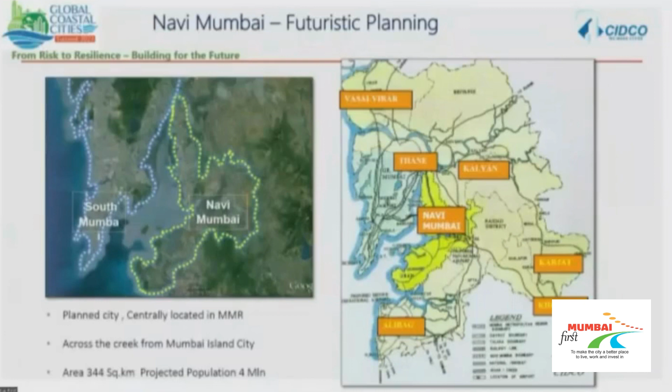And now, with the Mumbai Trans-Harbour Link coming up, Navi Mumbai is going to be one of the most important sub-regions of the MMR region.

When this city was conceived, it was just an area of low-lying lands as well as hilly regions. At that time, though this climate change and sponge city concept was not much discussed, the city planners of Navi Mumbai took a very important decision to create it. The base of planning of Navi Mumbai, or the design of the entire city, was based on the Dutch method of reclamation.

Navi Mumbai has a particular unique geography. It has hills on one side, and coastal region on the other, and the developable area falls between these hill ranges and the creek.

So during high tide, there is always a high probability of risk if it is coupled with high levels of rainfall as well as high tide.

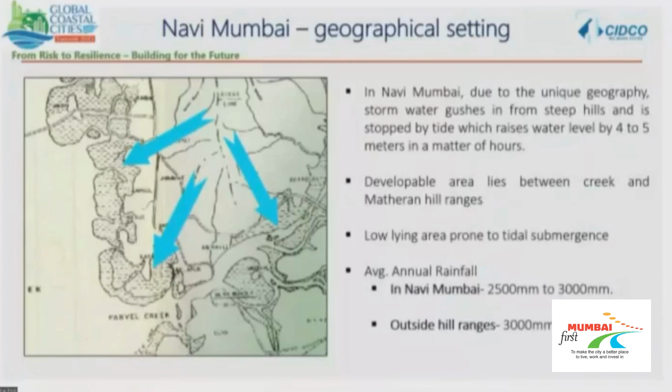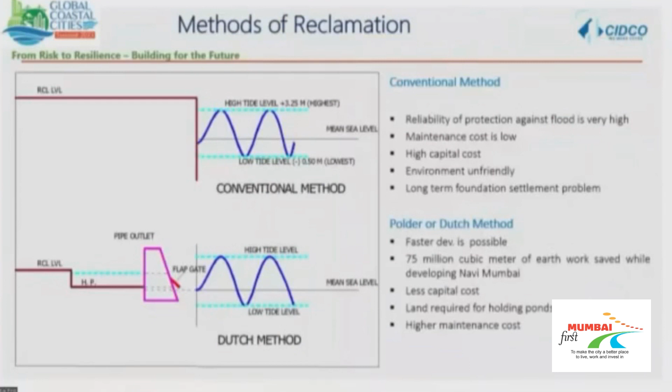This particular process was analyzed - the conventional method of reclamation, or should we go for this Dutch method of reclamation, where there's faster development. Maybe we kept the development levels at a lower level, and by creating bunds all along the coast and holding ponds - this is how it looks.

So if you see, there are hills, and the runoff from the hills and the hinterland - we have built diversion channels, and the township is built in that particular developable area. We have holding ponds with a non-returnable valve, which collects the water during high rainfall.

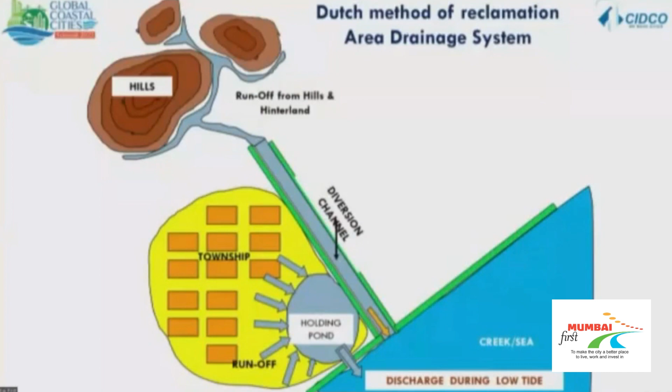In short, it is discharged into the sea during the low tide. This is how the system has been developed, and this has actually served the city for the last 50 years.

Except for the July 26th event, we have never had a flooding incident, or any kind of incident that old Mumbai has been facing. However, there have been issues, like bunds being broken illegally, or such things - we are facing certain problems. Otherwise, this system has been functioning quite well.

But however, now comes the development of Navi Mumbai International Airport, where we had to go.

This again is a kind of a tug of war between how the development should be, or whether we should develop such an airport in an environmentally vulnerable area.

But at the same time, the existing Mumbai airport was facing a lot of capacity constraint. We had no other option but to go for a second airport for the MMR, which is very important for the growth of the city for the next 50 or 100 years.

So in this case, CIDCO deviated. The Navi Mumbai airport is supposed to be a 90 to 100 million capacity airport, which is going to contribute a lot to the economic growth of the entire region, as well as maybe even the state.

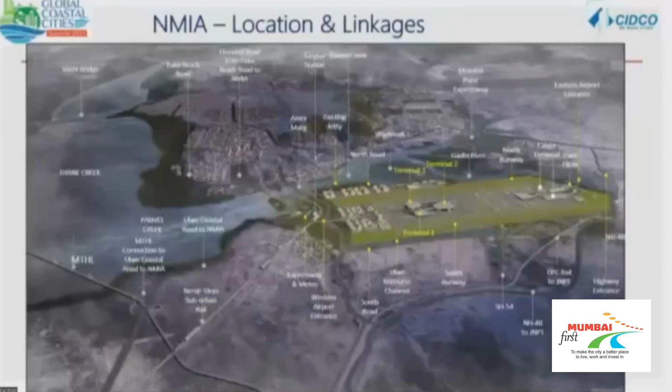It lands at Shivaji Nagar in Ulwe, and from there CIDCO is making a Palm Beach Marg kind of road, the Ulwe Coastal Road, which will have an elevated link that directly lands into the airport. Ultimately, when the Sewri connector is made, the Worli-Sewri connector...

Once somebody gets onto the Bandra Worli Sea Link, then you don't have to come down at all. You directly land into the Navi Mumbai airport. That is the ultimate planning MMRDA is doing, which will ultimately make the airport accessible to the entire MMR.

So CIDCO deviated from the earlier concept for this particular project. We roped in CWPRS, the Central Water and Power Research Station, who are the main experts in modeling the hydraulics and concepts.

I'm not explaining the full thing, but we had CWPRS do the 1D and 2D models for the entire catchment area of the airport.

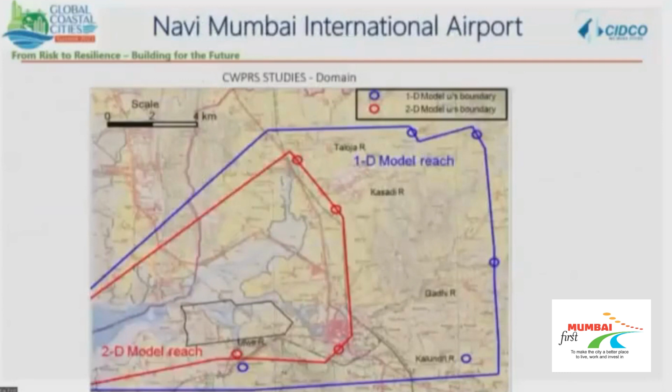They did extensive data collection: hydraulic data, topographical data, hydrological data. They considered rain gauge measurements, and Colaba and Santa Cruz have 50 to 100 year data available with them.

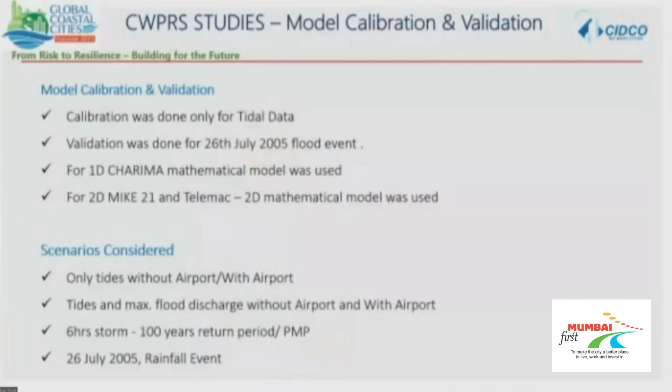The 26th July data was considered, along with the 50 to 100 year return period. Model calibration was done for tidal data, and validation was done using the 26th July rainfall data. Different scenarios were considered with tidal rise, the 100-year return rains, storm surge, and a 6-hour storm all happening at the same time as different scenarios were built.

Different factors were considered, including tsunami, and based on all this the safe grade elevation was finalized for the airport. It was fixed at 5.5 HFL, and then a 2.5 freeboard was considered.

So finally the airport level was fixed at 8 meters. In this 2.5 freeboard, all factors were considered: discharge, sea level rise, probability of tidal rise. Everything added up to around 0.7, which was added to 1.8. That is how we arrived at the 8 meter minimum level for the airport.

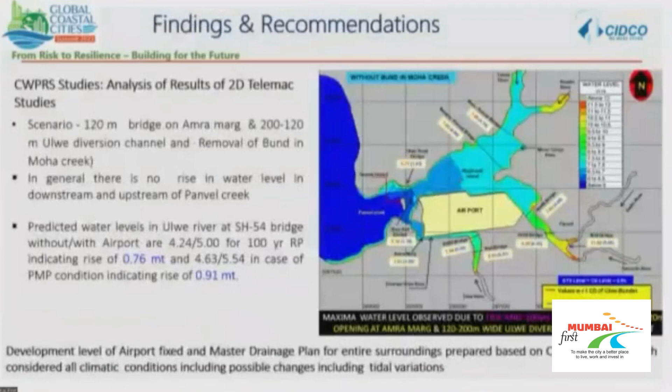And accordingly, the water levels were finalized, and they gave recommendations for the preparation of the master drainage plan for the entire area.

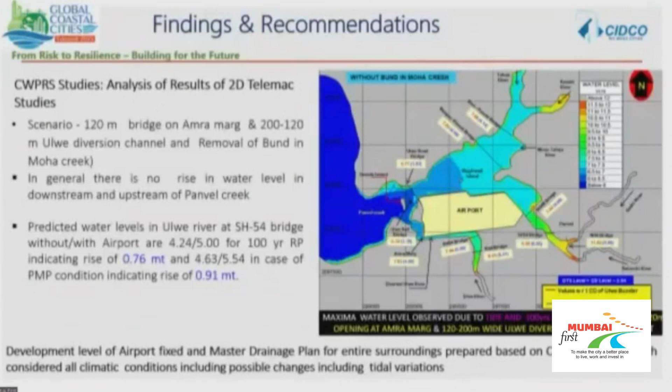Earlier, Mr. Dheeraj Mehta was mentioning the diversion of the Ulwe River. However, if you really see, in this entire system the Ulwe River was a very seasonal rainfall runoff, not a major river. The major river is the Gadhi River, which flows above the airport, and that was left undisturbed.

Only the Ulwe River, a very small water runoff, was diverted below the airport, and that too through a channel designed based on CWPRS's design. So now we did other protection measures too, like planting mangroves around as a buffer.

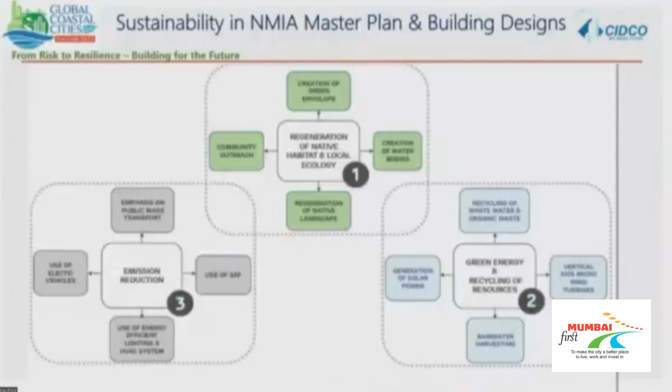The Adanis, who are our concessionaire, are also now very actively looking into how to build resilience for the future, how they are going to build resilience for climate changes. So here they are basically doing a three-pronged approach: regeneration of native habitat, green energy, and more.

For green energy, at our Navi Mumbai airport, it's for the first time that a new airport's fuel farm itself has a component for sustainable aviation fuel. Around 10,000 kiloliters of sustainable aviation fuel they're expecting. They are already in talks with the airlines. In fact, Indigo and Vistara have already tested with SAF in India, and they are going in a big way.

Even they are going to use it in wide-bodied commercial aircrafts very soon. So once NMIA is operational, we'll have sustainable aviation fuel, which is going to be a major future - that's one of IATA's strategies towards achieving net zero. They expect that sustainable aviation fuel can contribute around 65% to achieving this goal of net zero by 2050.

Similarly, we have other plans like usage of public transport, EV charging, electrical vehicles, and all that for the airport. These are basically how they are planning to achieve this.

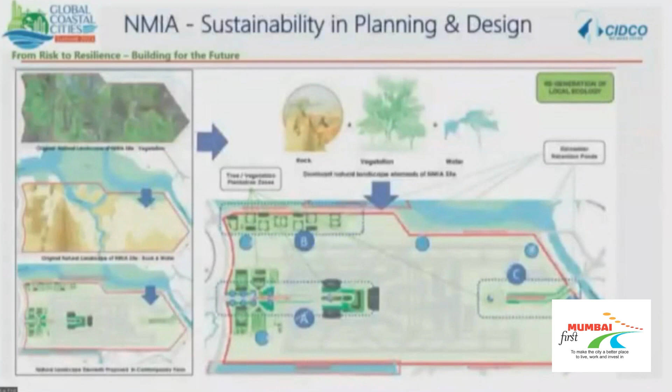So as a way forward, today the Coalition for Disaster Resilient Infrastructure, which is being launched by our Honorable Prime Minister, did a survey of around 111 airports. They ultimately got a response from everyone that climate change effects are going to create extreme situations in most of the airports, which might disrupt flight schedules and ultimately lead to economic loss.

That is why built-in climate resilience has to be incorporated into all the airports through various measures, and it has to start slowly and continuously. Vulnerability assessment and periodic risk assessment should be carried out - it has to become an integral part of all airports.

Today in India, we are becoming one of the largest domestic aviation markets in the world - number 3, in fact. We have many major and minor airports coming up in recent years. So as a conclusion, as many speakers expressed this morning, a very enabling rather than restrictive regulatory framework or guidelines have to be created for this particular aviation sector.

Like in Cochin, they had major issues, and what we are doing now is reactive planning. During Kerala's famous monsoons, the airport was completely flooded. The airport operator had to do a complete drainage cleaning exercise and had to create new channels all along the airport.

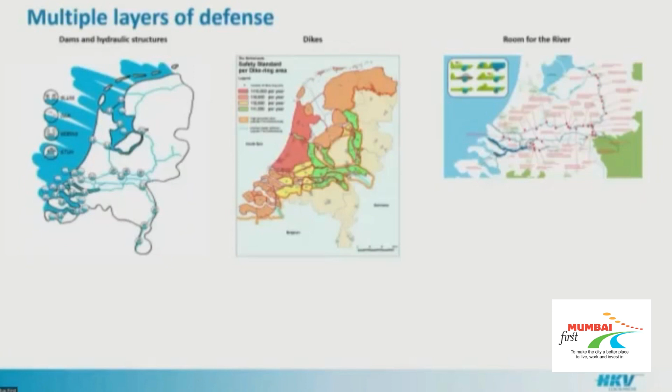And on the right, another strategy started about 12 years ago and completed by now, the Room for the River project, to also look at options to create space for the river and not only protect against it. And that's not all. There are more approaches: spatial planning within those dike rings, resilient infrastructure, emergency planning, early warning systems have been mentioned before. So it's really a combination of all those tools, all those solutions, to make the system work, and still learning from unexpected events.

Now, here's one very important point I want to make, because a lot has been said today already about the need for collaboration, working together, taking a holistic approach. So it's great to hear that. There's a willingness to work together, obviously here also, and a need to work together. But it's not only about recognizing the problems together, but also working together on solutions.

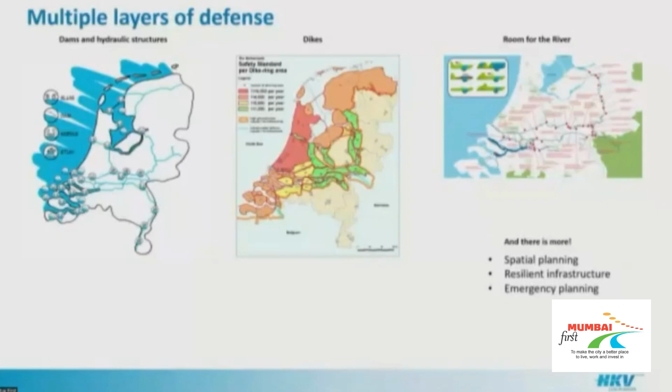Yeah, and this is where it becomes difficult. So what we have done in the Netherlands, we built decision support systems that simplify some of the processes, but really extract the key processes, key aspects, and key problems, also from different perspectives, and start designing solutions together. Unfortunately, I don't have time to give examples here today. We will actually be doing a workshop tomorrow which is a bit more technical. If anyone is interested, I can give you some information about it. But we have a planning kit for the Room for the River, and also for the morphological effects that can occur along the coast or in a river, that we can use to engage decision makers and all kinds of stakeholders to be part of designing solutions. And I think that's an important next step that needs to be done to really start talking about solutions.

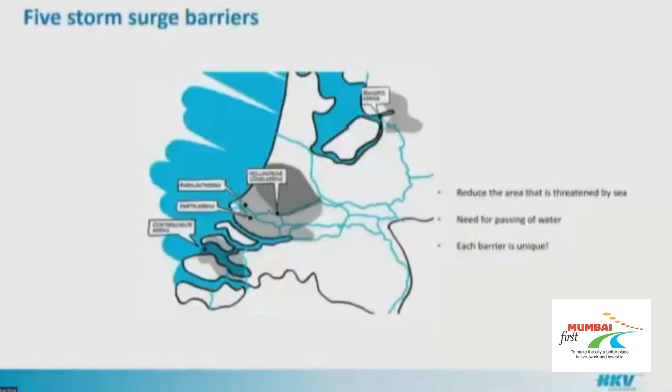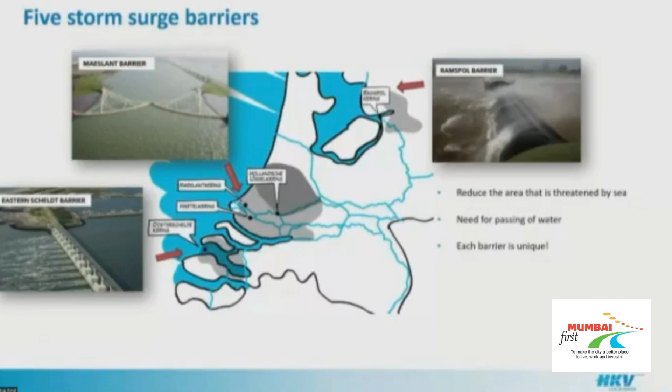Okay, and then just highlighting a few particular solutions designed in the Netherlands. So we actually have five storm surge barriers, three pictures here as examples. I'm going to borrow some words said earlier today: it also accounts for storm surge barriers—if you've seen one storm surge barrier, you've seen one storm surge barrier. They're all unique. This picture has been shown a couple of times before, but we also have another storm surge barrier, based on one inflatable tube. That works well there, but for other locations, obviously, that doesn't work anymore.

I'm going to try to keep it really short. I know there's a lot of interest for the Maeslantkering, our most impressive storm surge barrier in the Netherlands. Definitely the most recent one, constructed in the 90s.

To give you a sense of scale, both of these arms are about 210 meters long - that's basically the Eiffel Tower. Imagine taking the Eiffel Tower by its tip and moving it around through the river, and then two of them. It's really quite impressive.

That's me standing right next to it. When you're standing next to it, you can't really appreciate the size. You really have to see it from above to appreciate it.

Some details - I'd be happy to explain more if you're interested, but I think I'm going to leave it here, considering time.

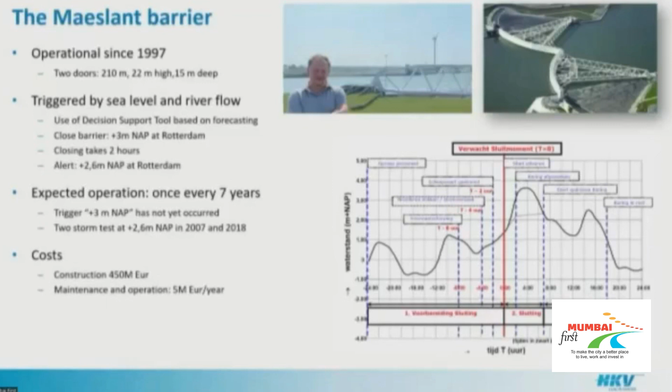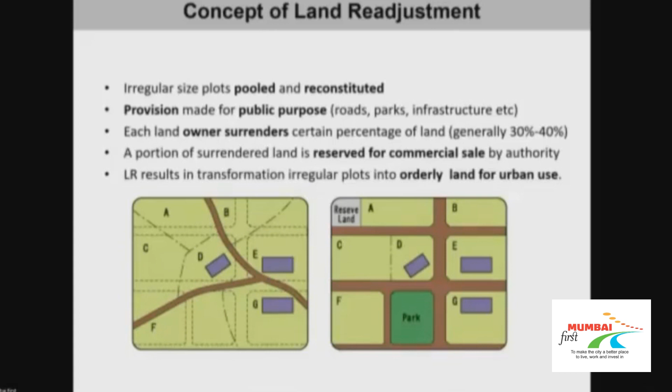Essentially, when we do a TP scheme, we are trying to regularize irregular plots within the rural area as the city grows towards the rural fringe. We try to reconstitute the agricultural fields, make rectangular plots out of them, and lay out infrastructure for roads, gardens, and other services, then reserve some land for sale.

Generally, the authorities sell this reserved land in the market to generate revenue, out of which the authority or urban local body develops infrastructure within the TP scheme area, making it self-financing. The ULB does not have to spend money from its own pocket. In the process, land is also reserved for parks and gardens, as we can see.

Within this TP scheme—normally what we are doing here, I'm not sure if this is very readable... oh, it can be seen, okay. This is an example of a TP scheme or land readjustment project from Japan.

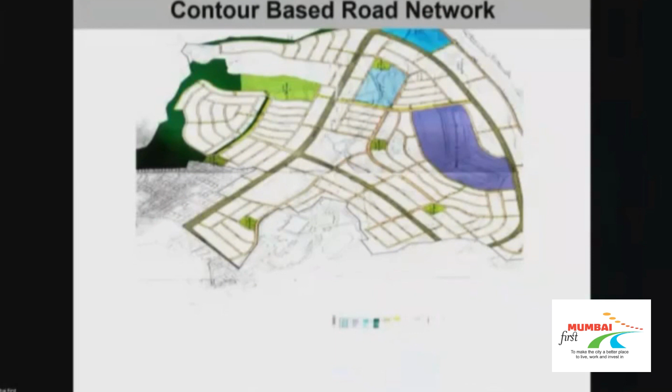In India, when we do micro-level planning, our road hierarchy does not follow the natural contours of a place—it follows given engineering standards like arterial and sub-arterial roads. But these roads, not being laid according to contours, often hinder the flow of natural water. In Japan, they use contour-based planning, where flood prevention happens at the planning level itself—the city is planned to promote water discharge in a planned way rather than water accumulation.

This is essentially for a greenfield area. When they make the contour-based plan, they also reserve land not just for parks or commercial sale, but also for accumulation of water. So each TP scheme has a flood control reservoir within the area.

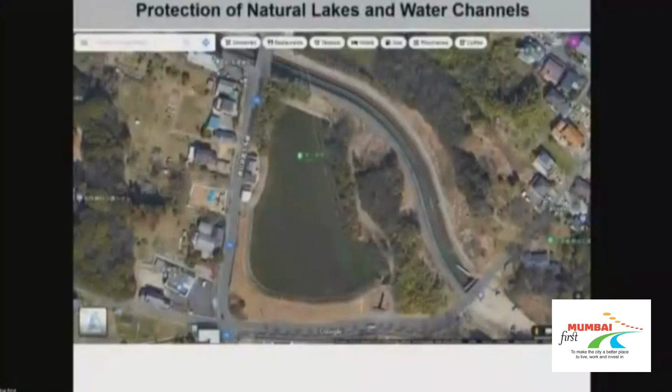The lowermost point in the given area for planning is identified. If there is an existing water body or lake, it is retained, and sometimes deepened. These are Google images I took this morning and last evening—this one is from a city in Japan, showing a flood control reservoir.

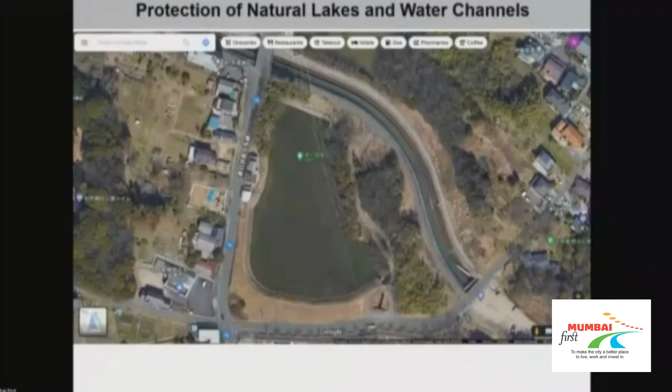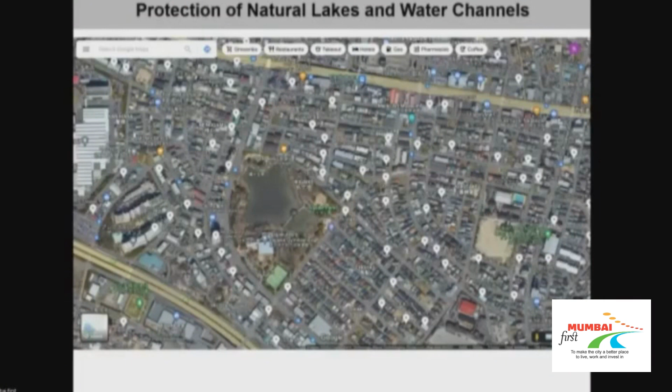This is another flood control reservoir. We can see that surrounding it, the roads are based on the contour geometry of the existing terrain—the terrain is not re-engineered too much.

Another example of a greenfield area—this is an engineered reservoir where there was originally no reservoir, but a lower point on the site was identified, excavated, and turned into a reservoir. Besides the reservoir, there's an urban park and urban forest created to promote biodiversity within the city.

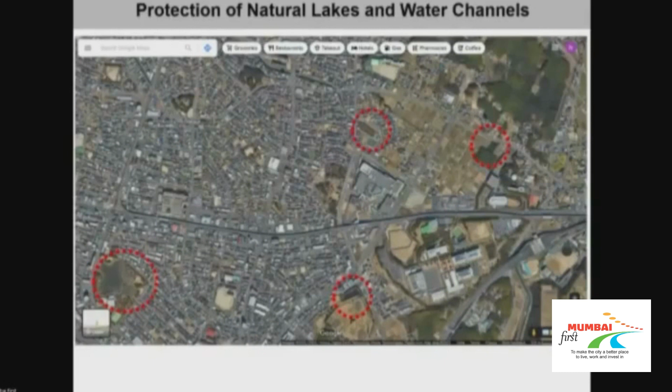We can see in the slides, if the red circles are visible, that there are four to five flood control reservoirs in this city. These are surface facilities—earlier in the morning we discussed subterranean water accumulation facilities, but this is on the surface.

Again, an example of an engineered reservoir—here we have sports facilities nearby the flood control reservoir. So there's a water body nearby, and then the sports facility as a complementary use.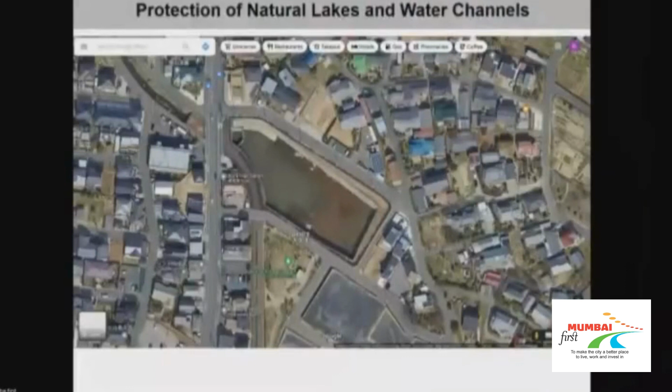That's how the TP scheme is used for creating flood control reservoirs. They may be small in size, but when we look at the macro effect at the level of the city, they act like sponges. This is the creation of sponge cities, as the gentleman from NDMA mentioned. The concept is when it rains, the reservoir should absorb the rainwater and gradually release it when required. So rainwater groundwater recharge is being done, and even nearby areas can draw water out of these flood control reservoirs.

This is another example, a river in Kyoto. People who have been to Kyoto would have invariably been here. It's a very picturesque and beautiful area to be in. This riverfront development in Kyoto, upfront, looks like a very simple project. There is nothing extraordinary about it.

But this is fundamentally different in its approach to riverfront development. What they've essentially tried to do is retain the natural channel of the Kyoto River. Nearby, on the edges, terracing has been done using stone masonry. There is no concrete used, or if at all, it is very minimal. Stone pitchwork has been done, and as much as possible, the natural drainage channel has been retained.

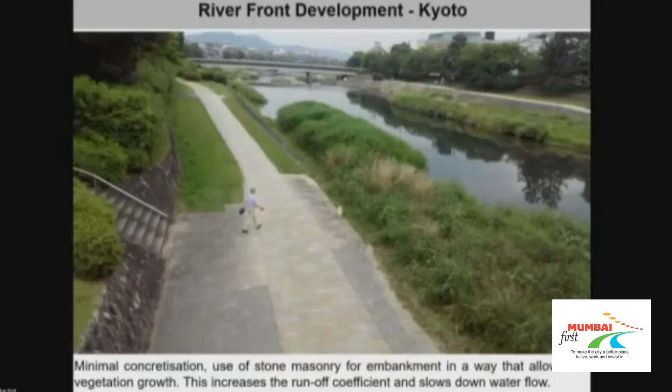The budgetary constraints of high-intensity projects mean they are not suitable for all the cities in the country. Focusing on Mumbai, of course, Mumbai has deep pockets - the city has money to develop some of these projects. But when we look at other coastal cities within the country, we are not comparable. I was in a city called Toyama in Japan, and I asked about the budget of the local government - the per capita money they could spend was much, much higher than what we are doing for Ahmedabad or Gandhinagar. So the kind of investment doable in Europe, in the developed part of the world, is not comparable to what is done in India.

Secondly, the cities that exist today in India are located where they were suitable as per past preferences or conditions. Given climate change, flooding, and sea level rise, these locations may not be suitable in future. We may need to rethink, when planning regionally, whether the same locations are suitable for the next 100 years. If not, we may need to relocate our investment to more suitable areas. The coastline will be receding, the water will rise, and new coastlines will emerge. Maybe new cities will develop, or present cities will shift a bit, and those areas may be more suitable for development.

Port of Antwerp, as such, we've done some initiatives last year and before, and during COVID and during all these lockdowns and things that happened. Just to put it on the slide, these are just a few of them.

We formed a task force where we could do all the risk assessment and what is happening. So that is regularly done at the port area.

If you see that post, we actually created the border inspection post with the Federal Agency for Food Safety, Belgium Customs, and the Federal Police all in one line.

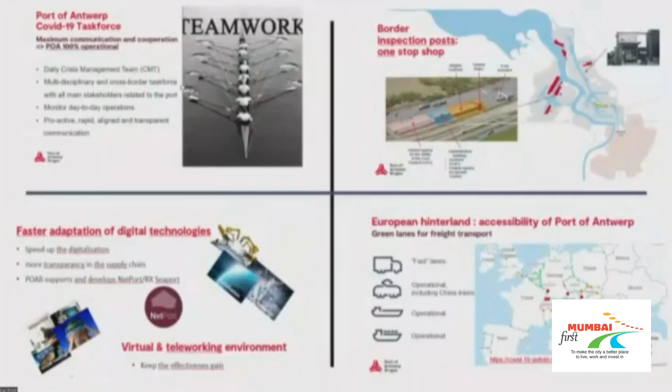So if you look at it from that perspective, there is less lag of time. Plus, if you look at it from a carbon emission perspective, you don't have to wait too much, so your trucks really move fast.

The one below is more of a digital platform, which actually shows a lot of the green lanes that were developed and where you find the lags that are happening. Again, movement becomes faster, the customers can track at the end, and these are all using the new technologies.

And the one here you don't see, it's the digitization and the innovation that is coming up in the port area. And how do we actually see that, because when you talk about sustainability, I think you also need to monitor things with the help of your digital aspects. And this will only happen when you are prepared with all the things.

I'll just show you a video which shows how, as a port, we are building up that infrastructure, not only in terms of the physical infrastructure, but in terms of the digital infrastructure.

We have a private 5G network that we are building up in the port area. We have customs, which is totally digitized, and a real-time 3D mapping of the port, which shows how we can monitor each and every activity happening at the port, including water levels, air quality, and any discharge that happens due to ships coming in, how many ships come in, and we do that by way of cameras, drones, and a lot of other assets that we put on site.

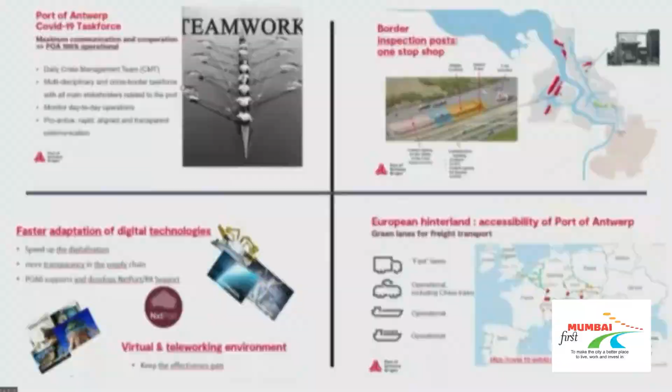General status report. Today is an overall sunny day, with a light breeze from the northwest. Port traffic is busy as usual at this time of day, with 221 barges and 180 seagoing vessels in port. We're expecting 95 new arrivals and 73 departures today. Road mobility is within efficiency norms. There are 2 air quality alerts and 1 ongoing event. Would you like to investigate?

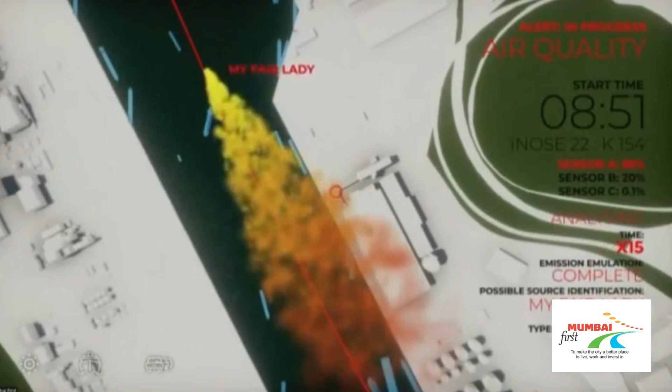At 8:51, INOSE 22 detected possible hazardous compounds. Analyzing. According to historic wind data and ship tracking, a possible cause might be the chemical tanker My Fair Lady. Would you like to collect an air sample? Please select available UAV. Calculating flight trajectory, ETA in 1 minute 30 seconds. Initiate. Confirmed.

I am APICA. Welcome to the port of the future.

So that's a port community system platform, an application that we use, and we could use it for various ordering of port services, including inland navigation services, towing services. That could be done on this platform again.

But just coming to the next slide, the VUCA world is not going away. We will have disruptions in the future, and I think the best part is to actually collaborate in a global scenario of different ports, and how do we actually ensure that we can network and cooperate together for avoiding or handling the next crisis better. And how do we do that?

In fact, we've been doing that with various other ports in the country. We're quite open to sharing information. If you look at the middle part of it, which is operational, industry, and logistics, we offer a lot of knowledge in terms of either technology, environmental services, training, port management, port analysis, economic growth, marketing - all these services, we actually offer quite a lot of knowledge.

Some of the references - this is one of our daughter companies, Port of Antwerp Bruges International, which does consulting, managing, and investment, also training, and I'll come back to the training aspect of what we've been doing in India. Some of the ports we have investments in are the Port of Duqm and Port of Açu. We have an investment in the port, and we also manage the operations there.

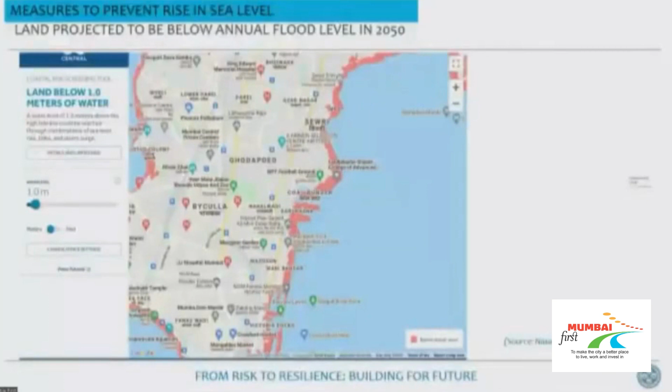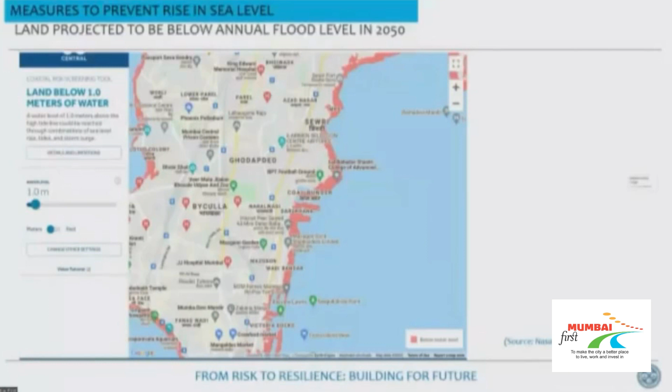So actually you have seen this map a number of times today, so I don't want to discuss that, but I'll give another angle. Being a port, we monitor the entire tidal actions, sea level, etc. 24 hours. We have found that in the last several decades, there is no increase in the sea level on the eastern waterfront side. Actually, Madras IIT also conducted a study 2-3 years back, and they also came to the same conclusion that there is no increase in the sea level.

But I don't want to contest this study or our study. There is a need to go deep into exactly what is going to happen in the future, whether there will really be an increase in the seawater or not. For that purpose, we are going to appoint an expert. The process is already on, to study how the entire sea will behave in the future.

And what mitigation measures are also required for the sea level rise. So basically in the planning proposal, what we did is well-designed stormwater drainage systems.

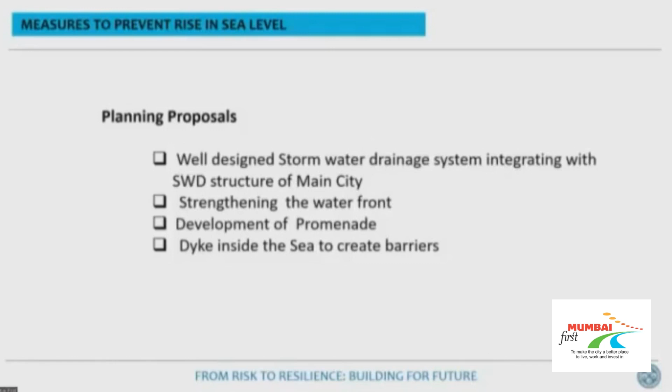Then we have the entire waterfront development related to strengthening the waterfront and development of the promenade, and another dike inside the sea to create barriers. This is what the proposals we did, along with various micro level interventions. This is the area, 253 hectares, proposed for the development.

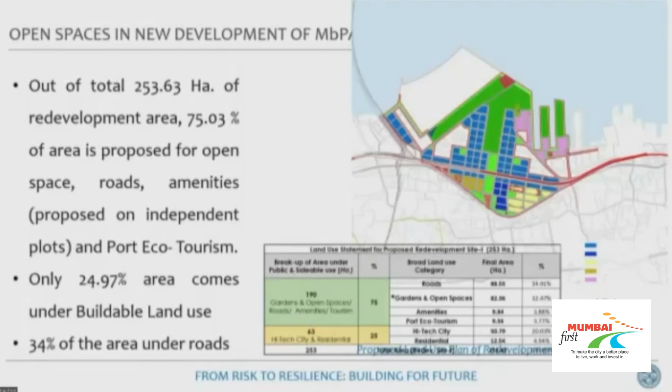In the morning, Mr. Pardeshi sir said that there should be more open space, more open land, and the entire development should be compressed together. The same principle is adopted here. Nearly 75% of the land is open use, which includes garden, roads, and amenities also. Only 25% land is for the development, our footprint is only 24%.

Nearly 32% land is under open space. Because of this open space, it will take care of sudden floods in the area. At the same time, the entire waterfront is proposed for green development. A large central park of about 145 hectares is proposed on the tip of the area.

In the entire plans, we also propose retention ponds. In the Central Park itself, there is one retention pond of about 7 hectares, which will be used for recreation purposes also. It will add to the aesthetic value, reduce the peak temperature, and also act as a flood risk reduction measure.

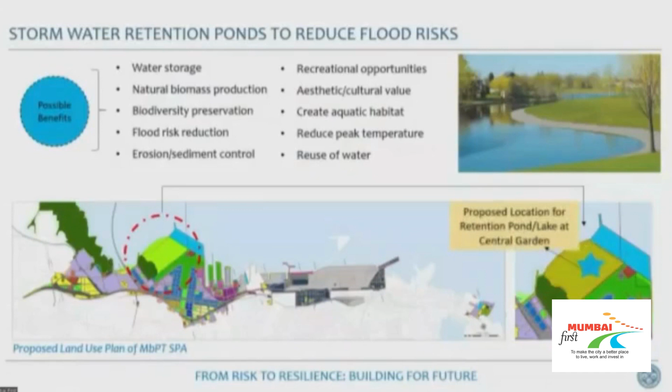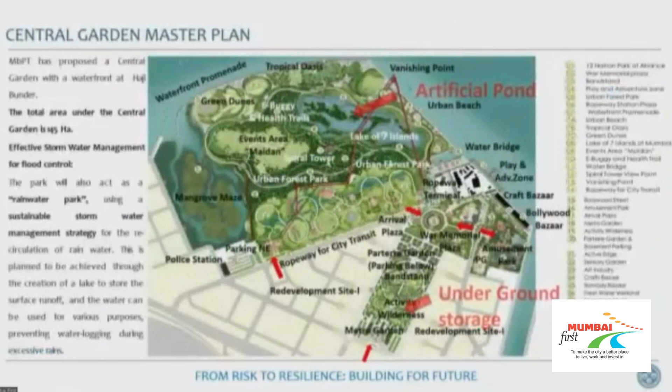This is the landscape plan, and we have 2 retention ponds. One is the artificial pond in the water area, and one underground or storage below the ground. This will take care of sudden flooding in this area.

At the same time, we also proposed an 11-kilometer long promenade along the eastern waterfront, with minimum width of about 50 meters. It will also act as a recreational area, strengthen the waterfront, and act as a buffer between the water edge and the development.

We have an MOU with the University of Notre Dame, and every year they take up a project from our area. Last year they took the same area for planning purposes, and proposed an artificial dike along the waterfront. This dike can be used for a coastal path, for bike riding, skating, walking along the scenic stage. This dike integrates climate protection and coastal protection with other green and recreational purposes. It will also act as another retention pond, but this is also one of the solutions, one way to protect the area.

We have this road network, basically east-west major road network. It will not disturb the entire wind flow, and it will also be suitable from the stormwater drainage system point of view, because everything is going towards the seaside.

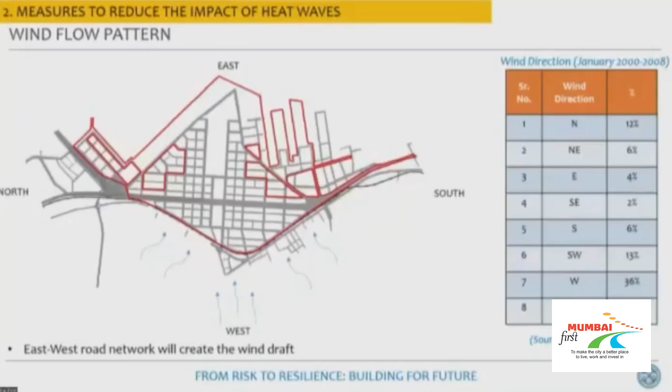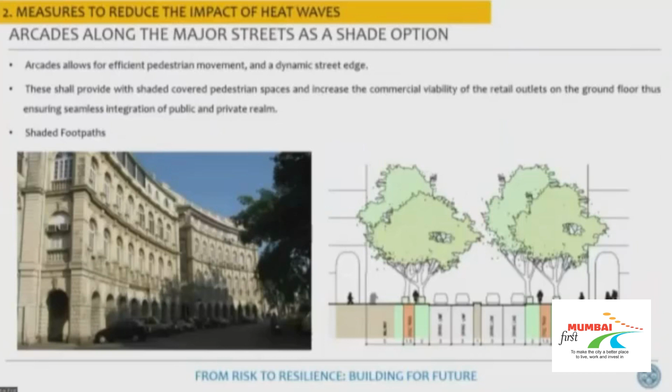We also proposed the arcade. I think the arcade is not new to Mumbai, the entire Horniman Circle etc. has arcade systems. But in this case, the entire area has been designed on the form-based code, where all the major roads will have arcades, creating a shaded environment for pedestrians. The entire cross sections have been designed accordingly.

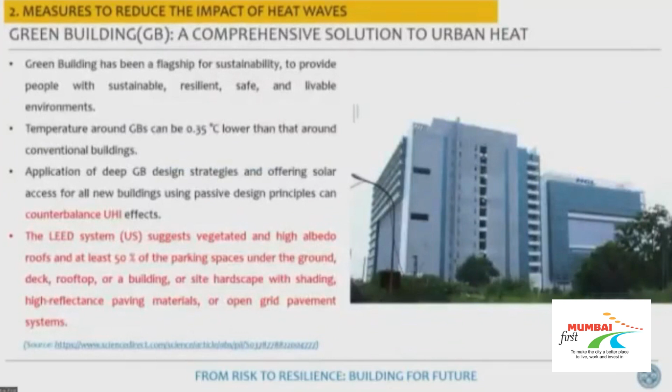We are also promoting green certified buildings in this area. Actually, public buildings should have mandatory green building certification, which will reduce the temperature both inside and outside the area.

We also designed a complete pedestrian pathway and bicycle pathway in the entire area. It passes through the green islands, parks, and also along the road. This will have cool pavements, cycle pedestrian green paths, green pavement, and parking pavements.

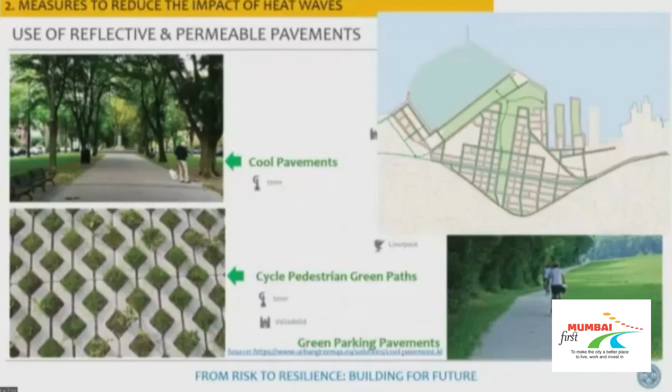We also propose to have green roofs wherever possible so that it will reduce the temperature, and it will also decrease the demand for air conditioning.

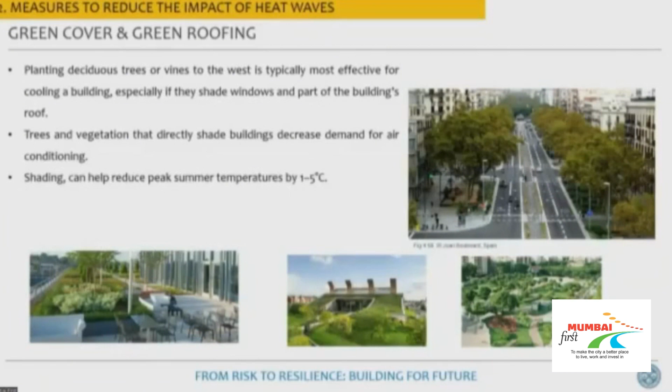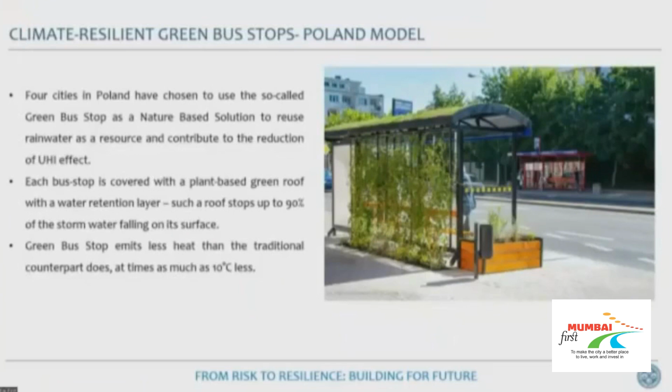There are various micro-level solutions, but one example is in Poland, where they constructed bus stops with a plant-based roof, where 90% of the rainwater is arrested, and it reduces the temperature inside.

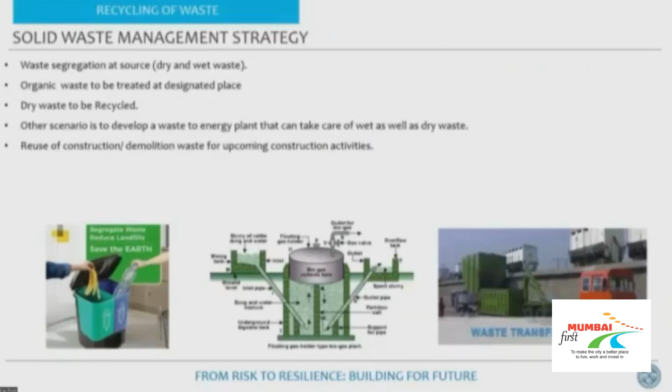On the infrastructure side, we also designed complete solid waste management systems. As Sir said in the presentation, it takes a zero-waste aim, which whether we'll achieve or not, that entire system is already in place, and once the plan is approved, we'll start implementation. We also developed the entire sewerage system, where 100% treated water will be used for recycling and flushing purposes. That's all.

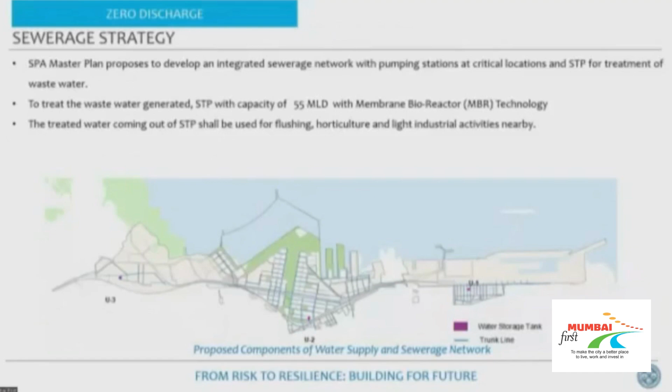I think we already have association with international players. For example, last year the EU conducted a workshop on bankable projects, and we are also in touch with them for further association. We have already made an MOU with the University of Notre Dame, and they are helping us in the entire planning process. We are also in the process of association with UR, Urban Renaissance from Japan, and they are trying to help us as well.

I hope that with association from all these people, we'll be able to develop the most efficient and functional city in this area.